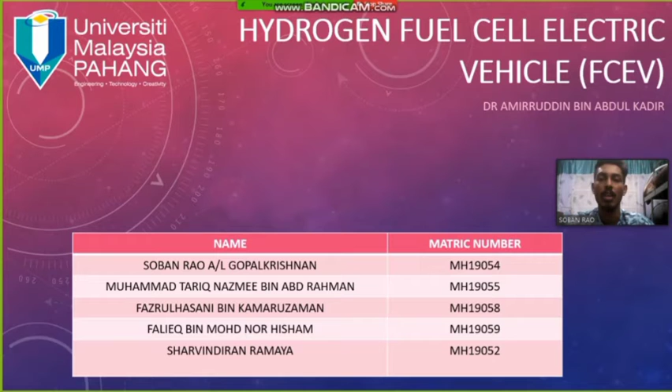Let's see the introduction. What is actually FCEV vehicles means? A hydrogen fuel cell electric vehicle is a motive-powered vehicle using hydrogen fuel. The power plants of such vehicle either burn hydrogen in a combustible engine or, more frequently, react hydrogen with oxygen in a fuel cell to power electric motors, transforming chemical energy to mechanical energy. Multiple hydrogen uses to hold fuel is a critical element in the proposed hydrogen economy. Right now, you could get behind the wheel of a car that burns zero fossil fuels and produces zero pollution or greenhouse gas, so this vehicle is very suitable for our Earth. It can be filled as fast as fossil fuels and provides a comparable gasoline driving distance. It can give competition to gasoline cars also.

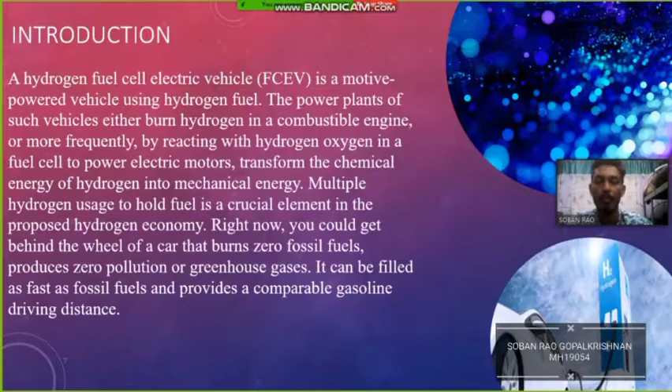Next we will see the FCEV vehicles and their features. First we want to see the 2020 Toyota Mirai Electric. Toyota is the first company that designed the hydrogen car, and they brought out the hydrogen car.

We're gonna see the features of the Toyota Mirai. The engine type: horsepower 151 HP, torque 247 lbs, transmission 1-speed direct drive. The dimensions are wheelbase 109.5 inch, length 192.5 inch, width 71.5 inch, height 60.5 inch, curb weight 4075 lbs, and ground clearance 5.1 inch.

We will see the chassis. The chassis includes frame type unibody, suspension front independent suspension, and suspension rear semi-independent rear torsion beam suspension.

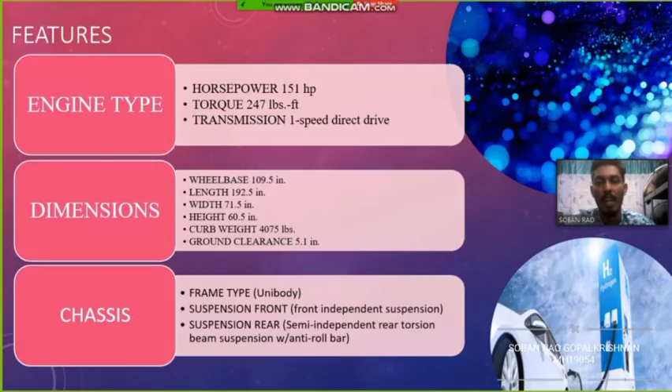The next car is the 2020 Hyundai Nexo fuel cell. The engine type: horsepower 161 HP, displacement 121 cu.in., torque 291 lbs, transmission 1-speed direct drive. The dimensions are wheelbase 109.8 inch, length 183.9 inch, width 73.2 inch, height 64.2 inch, curb weight 3990 lbs, and ground clearance 6.4 inch.

The chassis are frame type unibody, suspension front independent front strut suspension with anti-roll bar, and suspension rear independent rear multi-link suspension with anti-roll bar. So we see the introduction for the hydrogen FCEV topic.

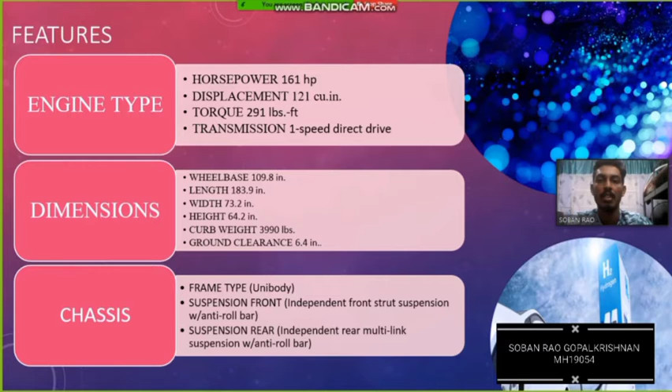So what is fuel cells? Fuel cell is a promising technology for use as a source of heat and electricity for a building, and as an electrical power source for electric motors propelling vehicles. Fuel cells operate best on pure hydrogen. Fuels like natural gas, methanol, or even gasoline can be reformed to produce the hydrogen required for fuel cells. Some fuel cells can even be refueled directly with methanol without using a reformer.

So the way it works is it combines hydrogen and oxygen to produce electricity, heat, and water. It is often compared to a battery because of the way it works, but fuel cells never lose their charge as long as fuel, the hydrogen, is supplied. As you can see in the GIF in the presentation, the hydrogen is supplied to the anode side of the fuel cell, while the oxygen is supplied from the cathode side. In the middle, they put platinum as a catalyst to speed up the chemical reaction.

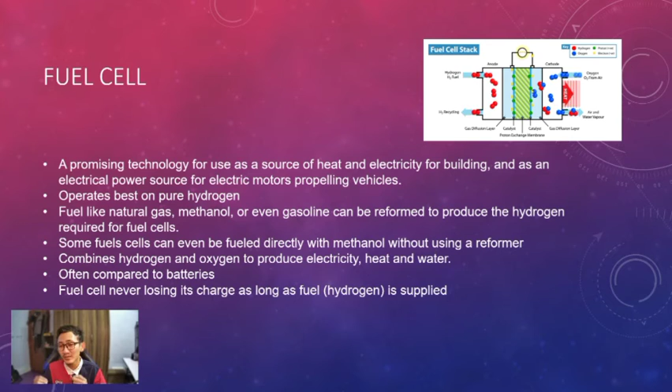So what is the difference between FCEVs and EVs? The difference between FCEVs and battery EVs is the fuel type. FCEVs use hydrogen as its fuel, while battery EVs use electricity as their fuel. The refuel time used for FCEVs is about the same as a conventional car, while battery EVs take hours to fully charge.

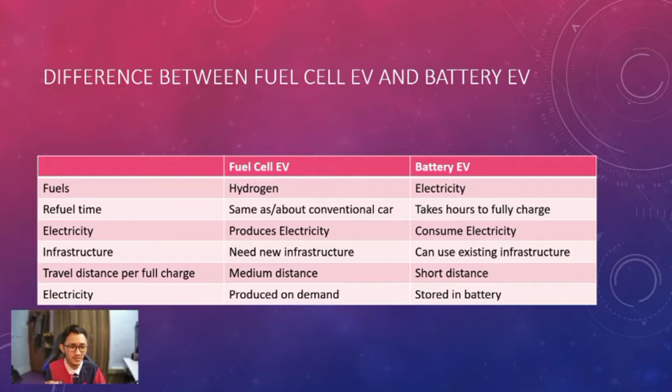In FCEVs, it produces electricity on demand, while battery EVs consume electricity. So it seems that fuel cell EVs use hydrogen as fuel, so it needs a new infrastructure, while battery EVs can use the existing infrastructure. The travel distance per full charge for fuel cell EV is medium and can be compared with a conventional car, while the travel distance for battery EV is about just half of an average conventional car.

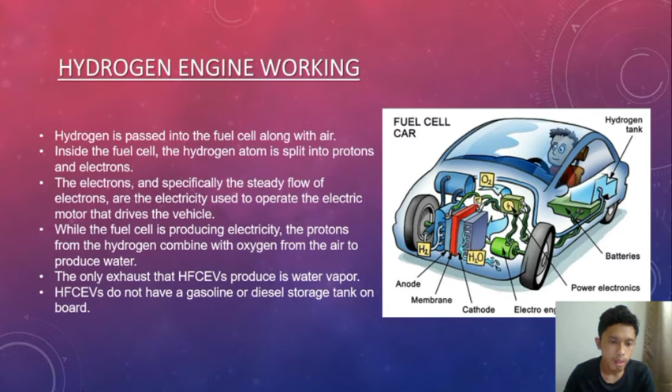Okay, next the picture show is how it works: the hydrogen tank, the battery, and the fuel cell stack.

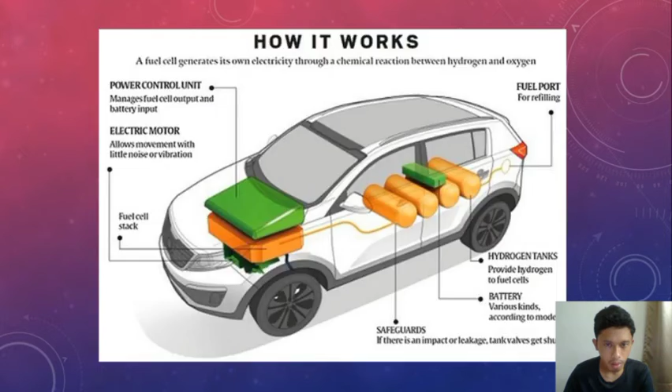The advantage is first, a lighter drivetrain. It is because of the small and lighter battery used, so it can go further because of the lighter weight.

It is also fuel efficient compared to diesel or gas. Hydrogen is much more fuel efficient as it can produce more energy. This means that if a car is fueled by hydrogen, it can go further than a vehicle loaded with the same amount of fuel but using a more traditional source of energy.

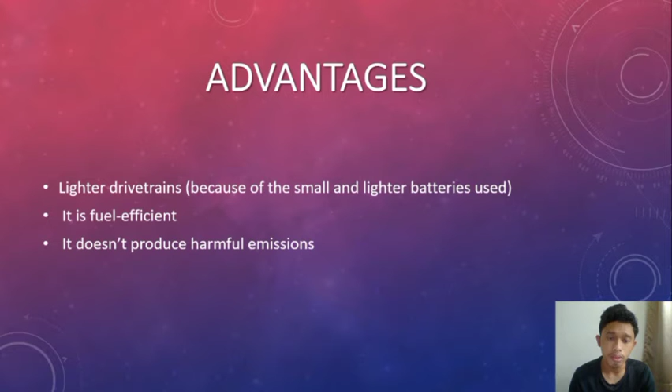The last advantage is it does not produce harmful emissions. When hydrogen is burned it doesn't emit harmful substances. Basically it reacts with oxygen without burning, and the energy released can be used to generate electricity to drive an electric motor.

Now the disadvantages. First, high cost - it is very expensive to purchase this vehicle because of the hydrogen itself. Second, a massive lack of refilling infrastructure - refill stations are not too many, there are only a very few number.

Third, it is highly flammable. Since it is a very powerful source of fuel, hydrogen can be very flammable. In fact, it is in the news frequently for its many risks.

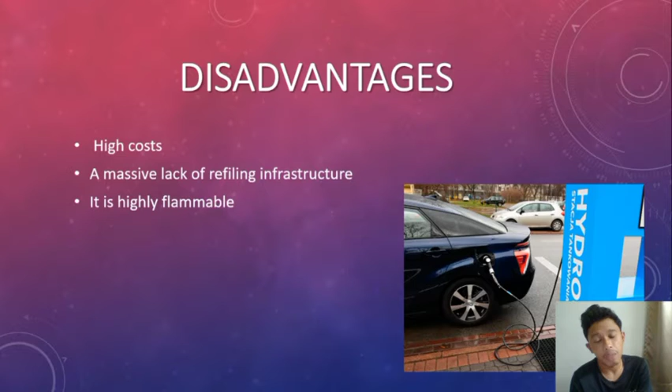First point is hydrogen storage. It is difficult to store enough hydrogen on board to allow it to travel as far as conventional vehicles.

Number two, cold weather operations. Membranes can be damaged if water in the cells turns into ice.

Number three, stack cost - fuel cell vehicles need to be competitive with today's internal combustion engine technology. Number four, competition with other technologies, which is diesel and gasoline powered vehicles and hybrid electric vehicles.

Number five, public acceptance - hydrogen is more expensive than gasoline. And the last point is expensive cost - expensive materials are needed to produce hydrogen cars, such as platinum for the catalyzer.

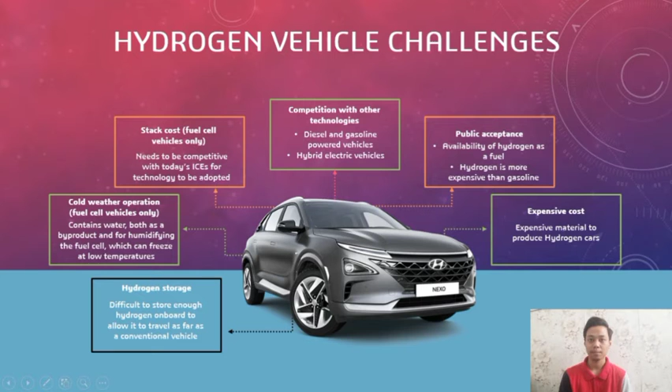Next I will explain how environmentally friendly and sustainable hydrogen fuel cell technology is. A car that uses renewable energy and produces no harmful emissions would be ideal from an environmental point of view. The exhaust gas from a hydrogen engine consists of pure water vapor.

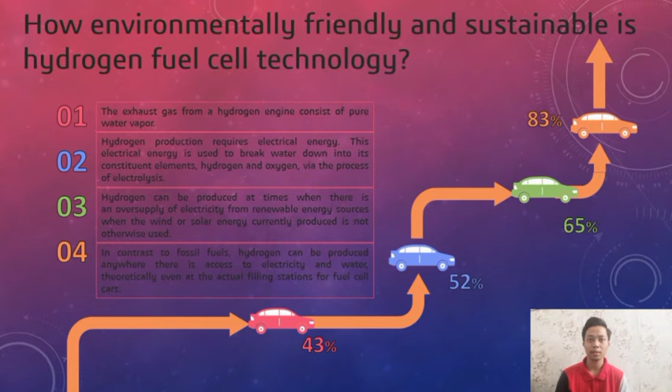Hydrogen production requires electric energy. This electrical energy is used to break water down into its constituent elements via the process of electrolysis. Hydrogen can be produced at times when there is an oversupply of electricity from renewable energy sources that would not otherwise be used. In contrast to fossil fuels, hydrogen can be produced anywhere there is access to electricity and water.

I will continue with the role of hydrogen fuel cell technology in the future. Hydrogen powered fuel cells are far more energy efficient than traditional combustion technologies. Fuel cells could power our cars, with hydrogen replacing the petroleum fuel used in most vehicles today.

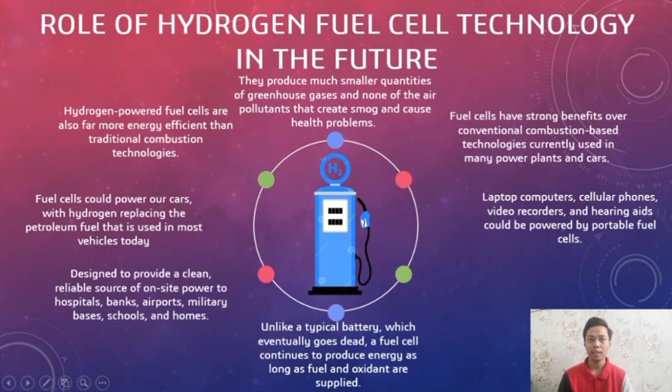Hydrogen is designed to provide a clean, reliable source of on-site power to hospitals, banks, airports, and homes. Therefore, laptops and computers could be powered by portable fuel cells. Fuel cells have strong benefits over conventional combustion-based technologies currently used in many power plants and cars.

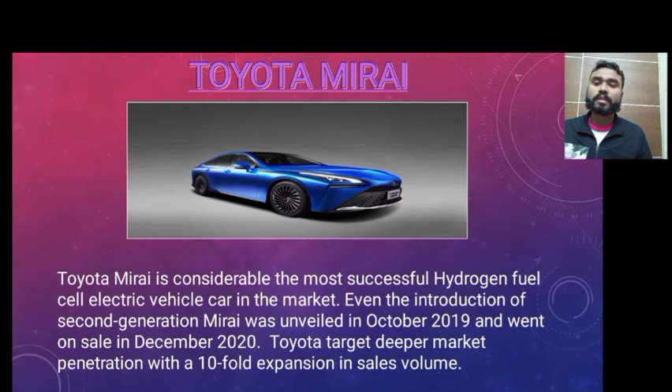Toyota is targeting a tenfold expansion in sales volume. The growth will be supported by the new model's stronger performance and greater customer appeal, and also a selling price reduction of around 20%. The practicality of hydrogen FCEV ownership will also steadily increase as the market improves.

Hopefully in the future, the hydrogen fuel cell electrical vehicle will also be available in Malaysia.

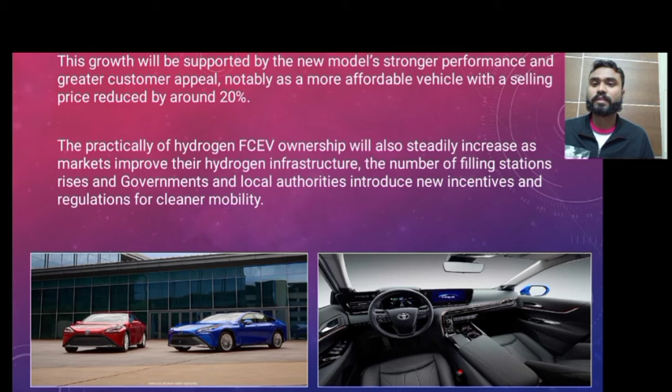Next, I would like to highlight the safety features in the Toyota Mirai, because even with the price reduction of the Toyota Mirai to make it more affordable for more people, they still did not ignore the safety features. Some of the next generation Toyota Safety Sense features we highlight include the pre-collision system with pedestrian detection, lane departure alert with steering assist and road edge detection, automatic high beam, dynamic radar cruise control, and road sign assist.

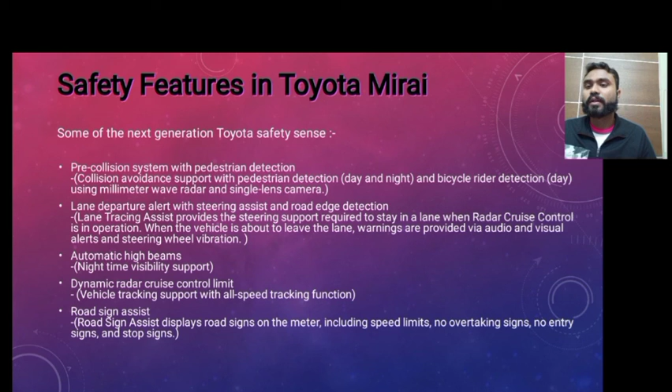Then there is also a list of other safety features keeping up with the current technology era, which is available in most of the current cars in the market.